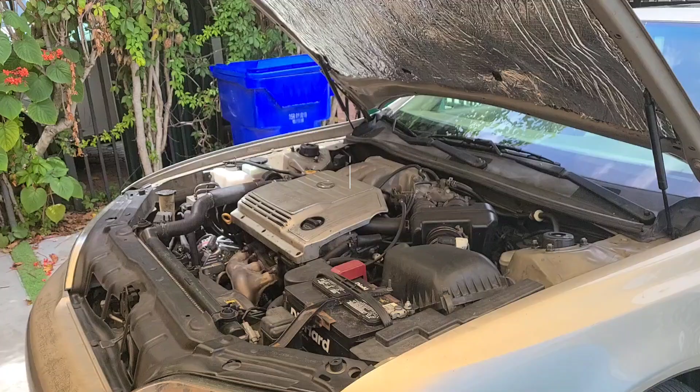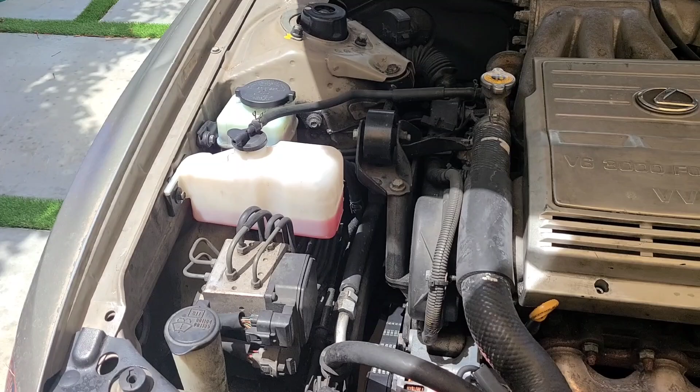In today's video, we are going to be replacing the transmission fluid, the coolant, the radiator, and this auxiliary, the two transmission filters on this 99 Lexus ES300. This transmission was built just over 30,000 miles ago, so we're going to be following the recommended time on that, and the coolant's about 41, maybe a couple thousand over 40,000 miles, so it'll be good. We're going to redo it all.

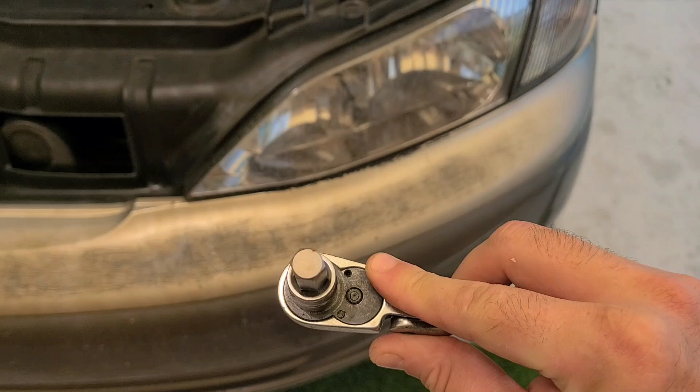This radiator, there's nothing really wrong with it, but it's about 5 years old, and I'm not sure what brand or anything that it is, so they're having a sale, and for about $100 I got the actual Toyota radiator. And since I'm swapping out all the fluids anyways, we'll be replacing that, and that's about my rationale for that. So step one will be to use this 10mm hex socket, get under there and drain the pan.

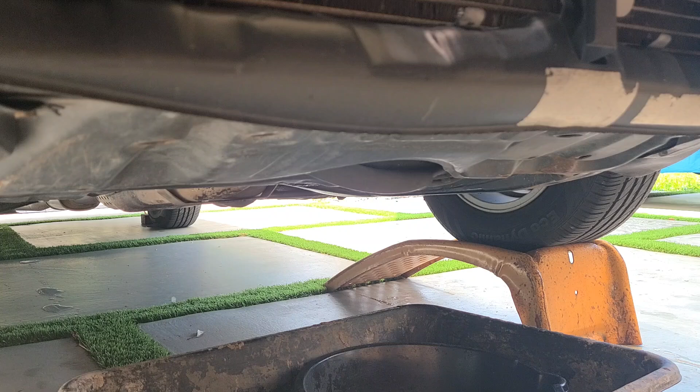Now the first thing that we're going to do is actually take out this dipstick. I need to go grab a paper towel to wipe it down. Now I've heard people go either way on this, but I've heated up the car and then I drove it around for a while. I've heard people say that it helps collect all of the... let me make sure I have this going the right way. That's counterclockwise. Okay.

Here goes the red. Ooh, that fluid is hot. Hot, hot, hot. Oh man, this is annoying. Ooh, that's hot fluid. God damn it. Okay. Oh boy, that is spilling everywhere. Great. That is hot, hot, hot.

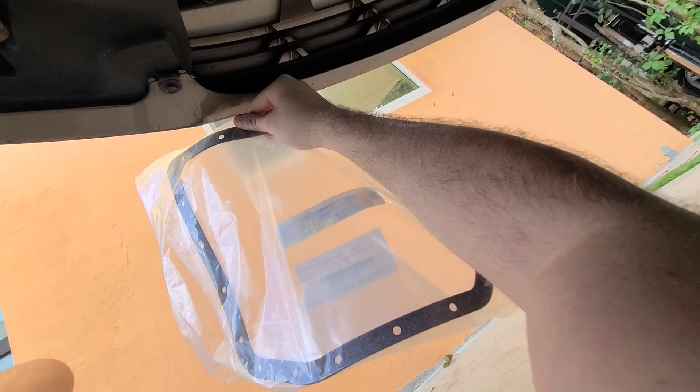The next thing we're going to do is we're going to remove the pan. To do that, we need to get to these 10mm bolts, and it's a bit tight in here, so let's see if this works. A couple tips I would give is, if you're doing the pan, make sure you have the right gasket. Especially on this car, they use two different transmissions, and they're very similar, the A541 and the U140E. So I just lined up all of the bolts and it looks like that's gonna work. And the other thing is to make sure that you can get to all the hard to reach bolts with whatever tool you're gonna use.

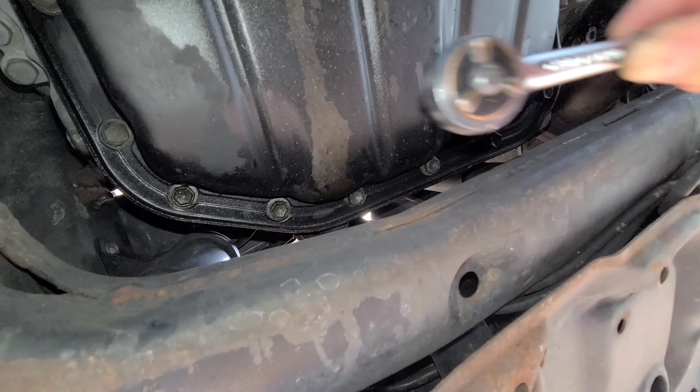And I think I am. I think in here, let's see, I think with an extension. So I'm gonna keep testing that. It's kind of hard to do it with the camera in hand, but I believe I can get to all these, especially these where the subframe is right there. So I'm gonna make sure I can get a good grip on all of them, and then we will slowly loosen this up and take this off. And part of the reason is you see that there's this wetness here, and I think that's coming from the pan seal. It may be coming from elsewhere, but we're gonna do a pan seal and filter replacement, so let's see how it goes.

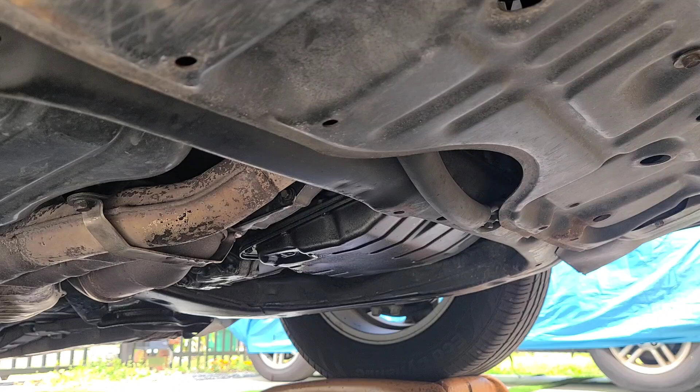Okay, let's get in there and see what we got. So let's test out. We can get to all the bolts. So I think this one a little tricky. Can I get to it from the other side? Move this.

Okay. Now let's see. So I can get one, two, three, four, 5, 6, 7. This little baby extension. Where's my baby extension? Okay. This little baby extension just gets us to this one, this one, this one, this one. Pop. These are just popping. Okay.

Okay, the pan came off, and I'll walk you through that. I just used this tool right here and got under, you see right there, right under there, and a little push and a tug and it came off. So we see here we have the strainer, I guess they call it, and that's dripping out. So we're gonna get to the filter in a second. We're just gonna let that continue to drip out, and let's take a look at the pan.

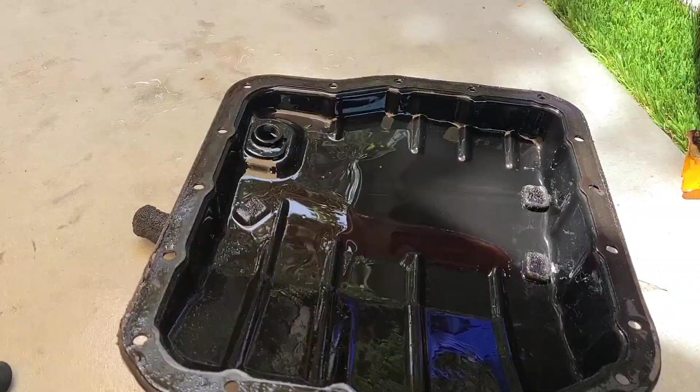So here's the pan, and interestingly, you see where the drain plug is, and you see how that's kind of elevated, so everything below that level doesn't get drained out. Now, I guess that's okay, but let's take a look at our magnets here. So we see there's a good amount of, where's that paper towel? Here's the paper towel. So we see here, good amount of crud on our magnets. So we'll be cleaning all of that up and then putting the pan back on once we change out the filter.

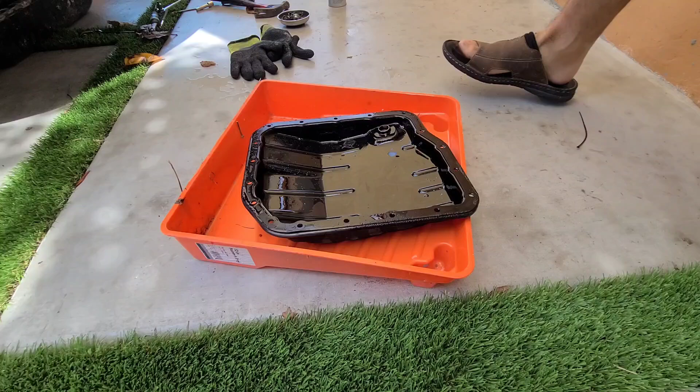Okay, so let's clean this off a little bit. We got our little magnets. Next we got some brake cleaner here.

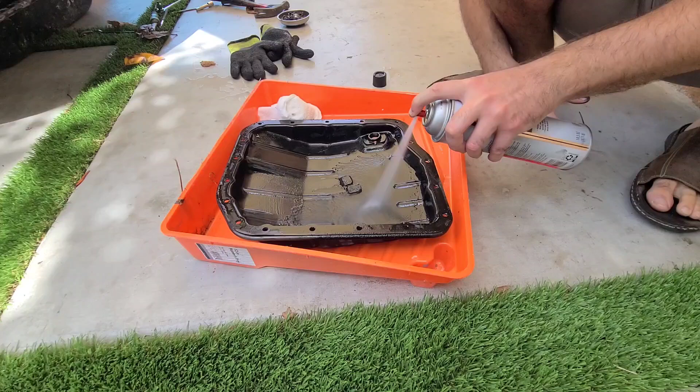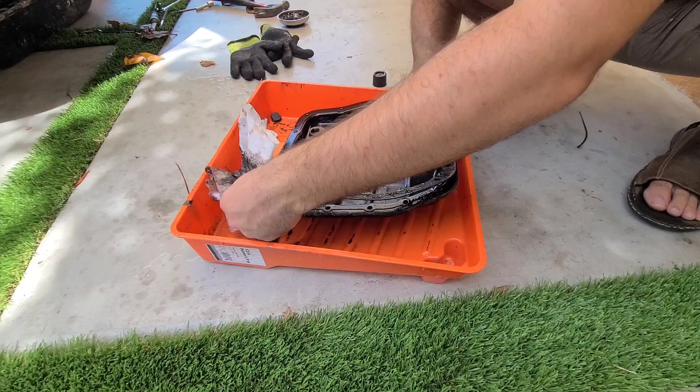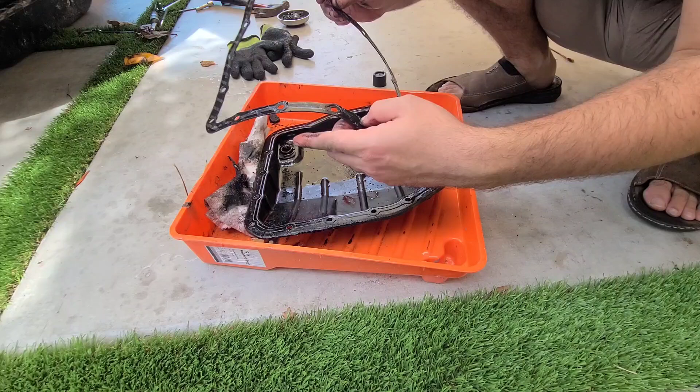Smell. Alright, let's get these magnets off. So I'm curious to see how much fluid this is going to take to refill. Now, I don't know if this is the original, not original as in, like, is this a Toyota gasket or is this... The Toyota gasket kind of has this corkish kind of look to it. So I'm not sure. Oh, we see this is 4-pack. So this is a 4-pack gasket for whatever it's worth.

All right. I mean, it's a little... I don't know if that's a paper gasket or what that is, but whatever. We're going to be getting rid of that. So let's give this a good clean down. Probably not good for your skin to do this without gloves, but you know, I don't do this often. Ooh. I may actually use some Dawn on this.

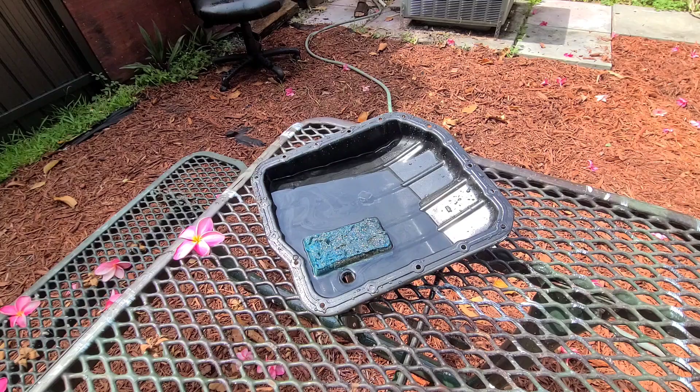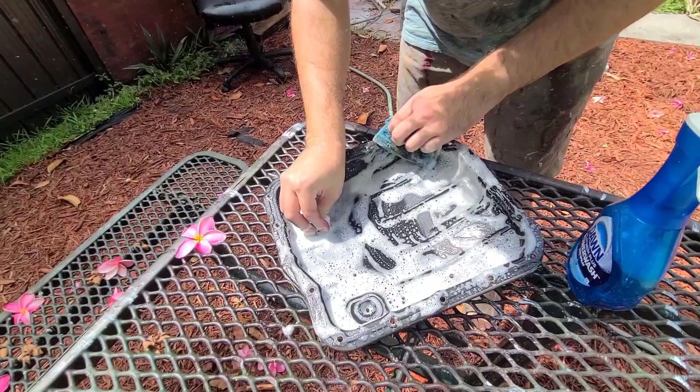Okay, so we're using some water. But we're going to use this Dawn power wash actually to try to get this clean. So we'll bring this out. This is supposed to be good on oil and a little less volatile. So let's get some of this and give this a nice scrub down. Look at that. It's like we're cleaning it like an oily dish. Let's see if we get these nice and clean.

Alright. We'll attach these to the bottom here. We'll do these separately, probably under some running water. I want to give this a good scrub down and rinse off. But this Dawn power wash actually breaks down the oil without it being such a volatile chemical. You know, not good on your skin and stuff. So this stuff should be working pretty good.

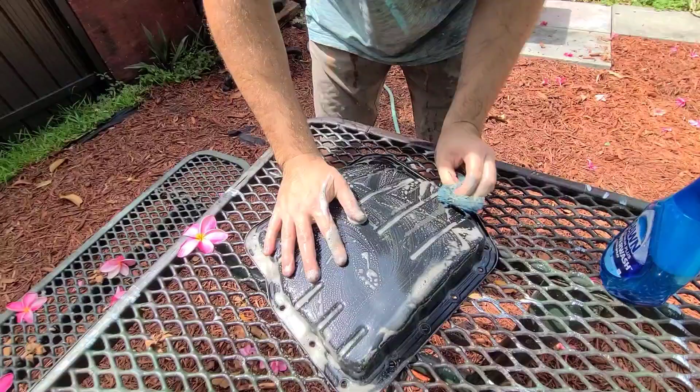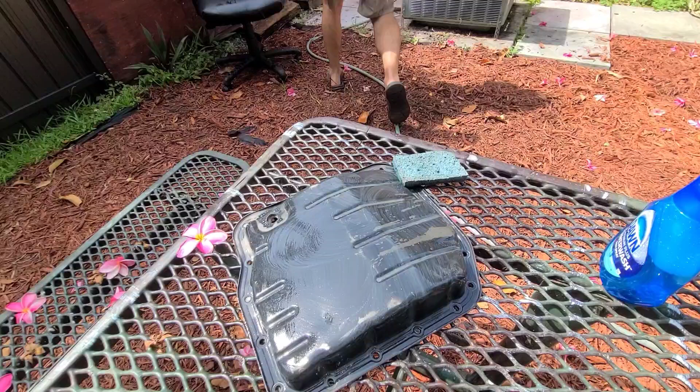Let's see, can I put this on my little... no, that doesn't attach there. Oh, actually, the table's magnetic, so let's... Okay, look at that. We're getting this nice and clean. Okay. Rinse this off. Or something there on the side. Wow, look at that. I'll probably do one more just to make sure we got everything. That's looking good. Okay.

Okay, now let's. Ooh. Yeah, that's looking good. Okay. So this Dawn Power Wash is great for oily parts without, you know, brake cleaner. You all know how volatile it is, hard to breathe, it gets on your skin and it starts feeling numb and weird, so rinse out this sponge.

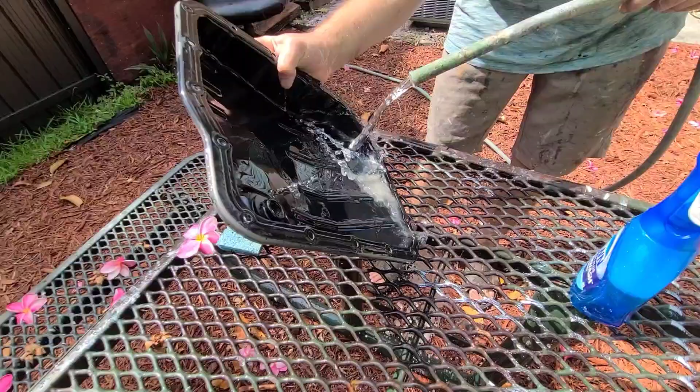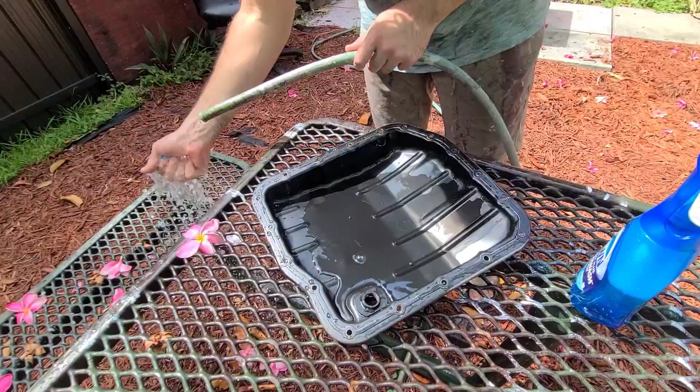Oh, there's still a little bit of oiliness here, so let's make sure we really got this sponge rinsed out. And let's try this again. Oh. Find these corners there. Okay, let's really get in there. Little corners and crevices and stuff. Really give that a good scrub down.

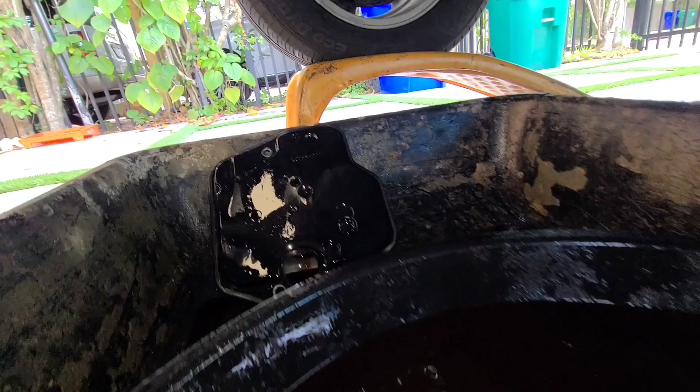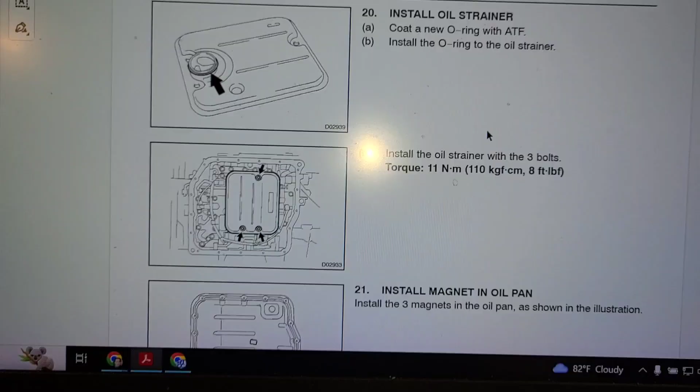Okay, so here we have everything fully disassembled. It was pretty easy to get those bolts off and get the filter. There we have our old filter. It's not that old, but we are replacing it anyway at the prescribed interval. And now let's take a look at the service manual, and the important things I want to see are where the magnets go. So we see here where the manual says that you should put the magnets, and they're pretty specific. It shows them even with a little bit of an angle. So we're gonna get that the right way, but before that, we're gonna put our new filter.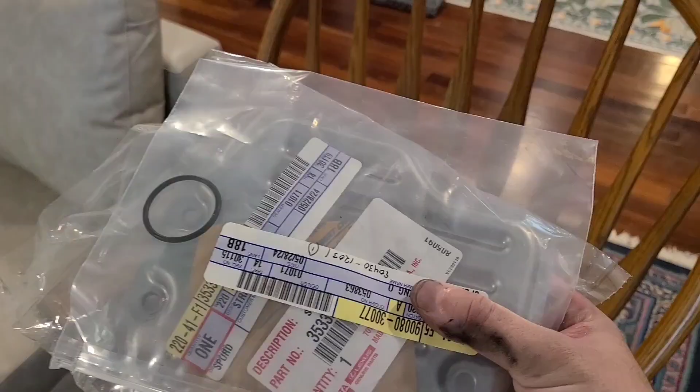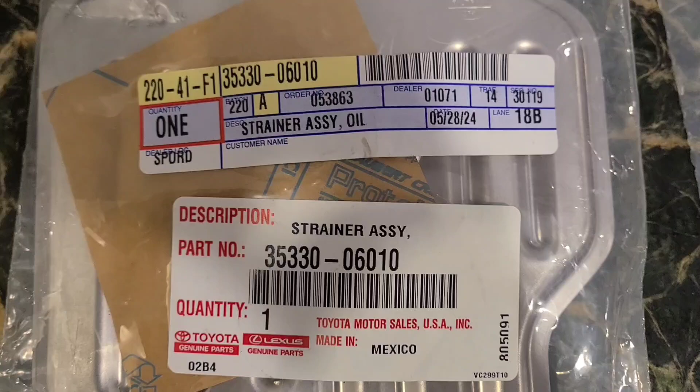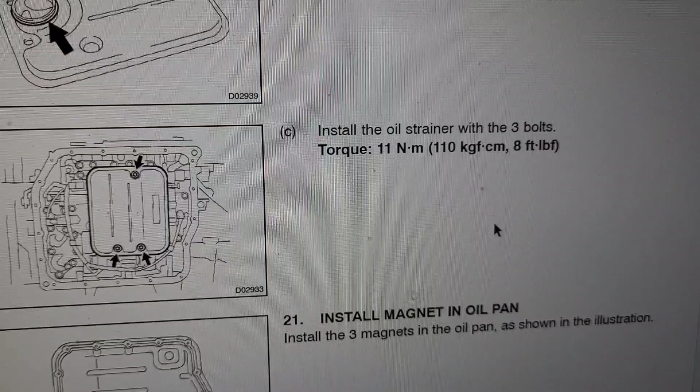Well, I guess technically it's a strainer, so if you want to see, here are the part numbers. For this strainer, for this particular car, even in the service manual it shows a different shape, but luckily the one that comes out of the car is that one. And we see here, this is the O-ring, very important, because as far as I can tell, it doesn't bring an O-ring. Yeah, I don't see any O-ring on here. So definitely want to get the O-ring if you're doing this. The other thing to take note of here is the 8 foot-pounds. I have a little torque wrench. I may just go good and tight, as they say, but we'll see.

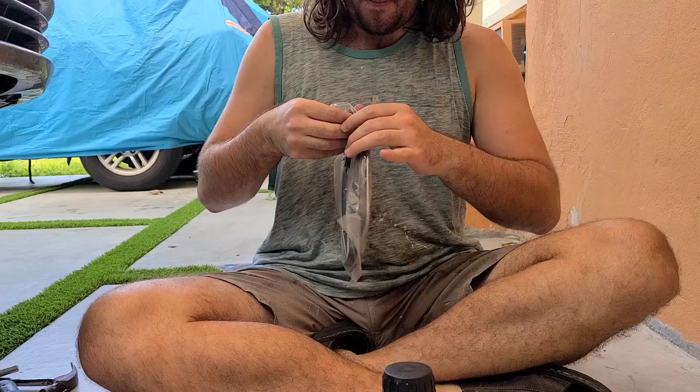So here we go. Let's take this stuff out. Okay. Carefully. Ooh. This comes undone there. I like this little cover that they used. Let's get our O-ring.

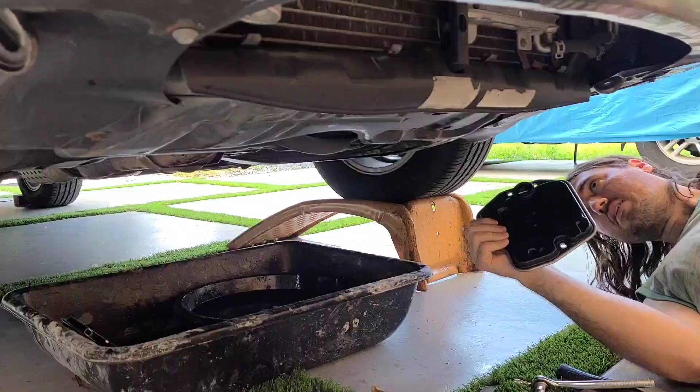And what we're gonna do here is I'm gonna pour a little in the bottle here. See, this is that type 4. And let's get it nice and submerged. Okay. Pour this back in. Okay. Some of that. Okay, so we see this is all looking good there. Get this in place. Goes like.

Okay, so I think we have the magnets on the right way here. Here we have how I have them on the pan. Here we have there, and we can see there's this slant here, so I don't want to put it over the slant because then it's going to be kind of sticking up a little. But other than that, I think we are looking good. So this pan is ready to go.

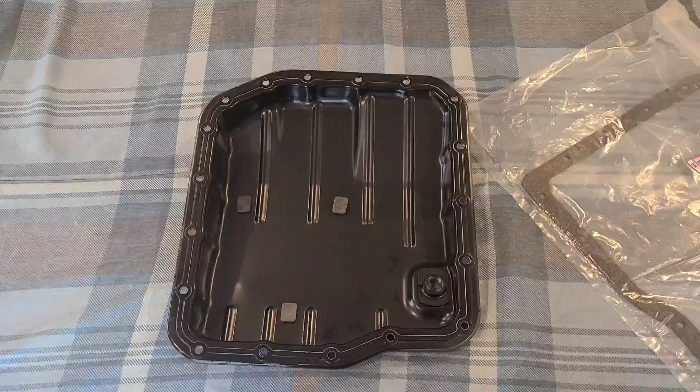Okay, we're about to put the pan on. Let's see how this fits. Now this is something. Toyota, they put these staples through the freaking gasket. Good thing I looked at that. That's not cool, Toyota. Want to make sure I keep track of those so they don't go in the pan. So those are there. Okay.

Nothing's in our pan. Alright. Looks like it fits pretty well. You see, it's like, yeah. Okay. And I'll be unstapling the gasket.

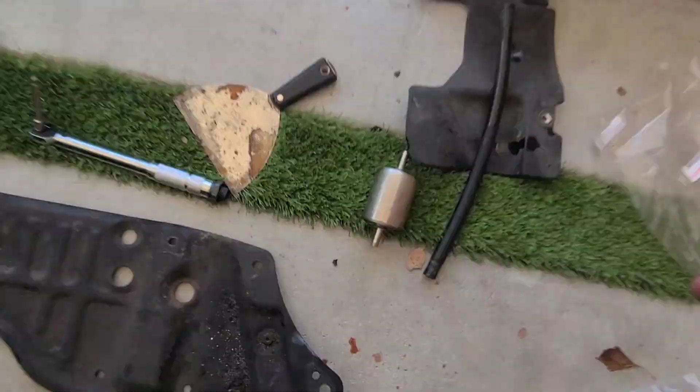Here's where we are right now. So we've taken off all of the transmission line hoses and drained those out. And if you've seen this car in a previous video, this car has an inline transmission filter, which I installed when I did the cooler. So I have a new one of these. This one I think only has like 20,000 miles or so, but since I'm switching everything out,

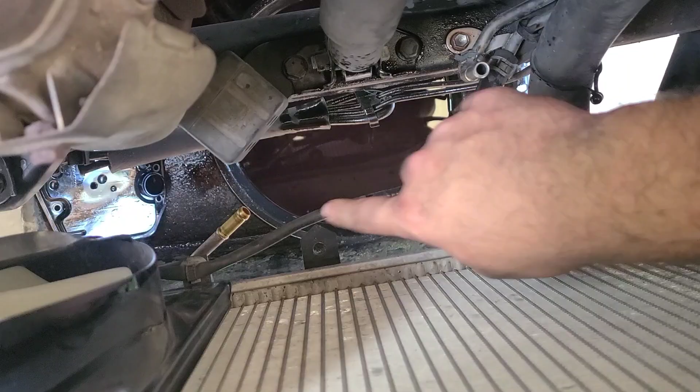the whole idea of putting the cooler and the filter was because this transmission would overheat. So just by the nature of what it is, this transmission's known to have issues. So I have a new Magnefine filter, and I run it inline right here. The flow of the fluid is that it comes out this line, it goes there, it goes through the cooler, it comes back, it goes into the radiator, through the radiator, comes back into

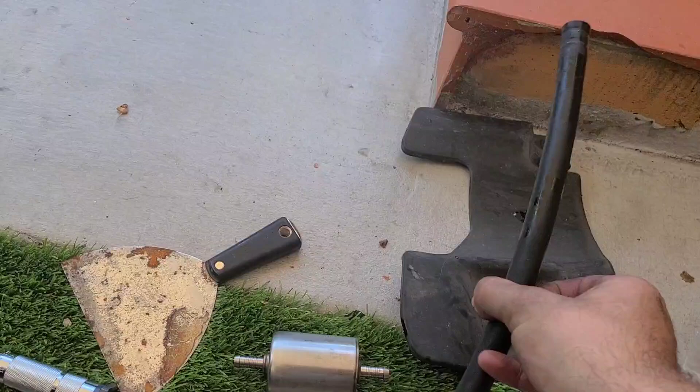the transmission. Now the quirk of it is that I had ordered this hose, you see this part number here, to replace this hose. This is, for all that I know, the original hose, but this part number isn't the right length. So here's the new hose, and it's about 3-4 inches short. So I'm going to use this to be the hose on the filter. And I also like that this kind of hose has this texture on it.

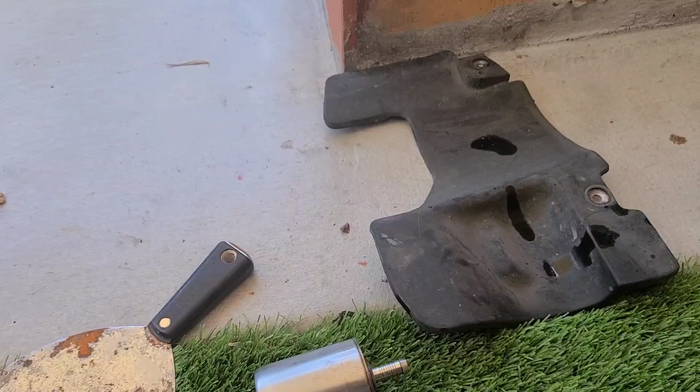If my camera would go in focus, there we go. Oh no, of course. Come on, come on, come on, camera. You can't do macro focus. You're not doing any focus here.

There again. So you can kind of see it. There you go with the light. And I kind of like that texture, especially for taking stuff off. And the other thing is that when I went to take off the old hose, I had to essentially ruin it because it was just so stuck on there. Whereas this hose seems to be snug, but it doesn't glue itself on there or whatever happened.

So in the future, hopefully I'll be able to find the right part number for this one, but it is not this. This is the long hose that goes from the radiator back into the transmission. So it needs to be a pretty long hose, but the one I got didn't work.

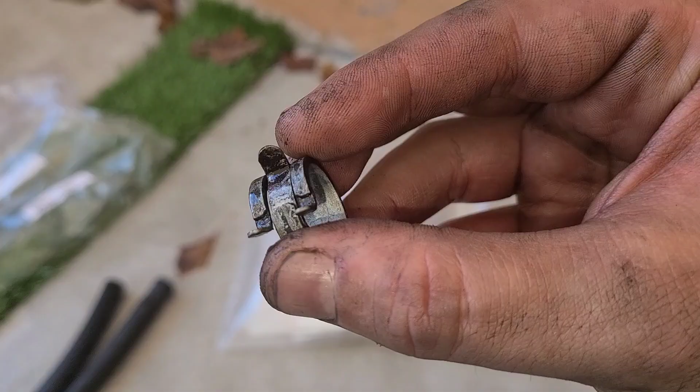The other thing I'm replacing is that originally they all use these clamps that have separated ears. I'm sure if you have the right tool, this is easy, but if you're using pliers like this, they are a pain in the ass because it slips off the little ears. So when you order the clamps nowadays, it comes like this. This is a much better style because there's a lot less chance that it slips off, because they've connected the ears with a bridge.

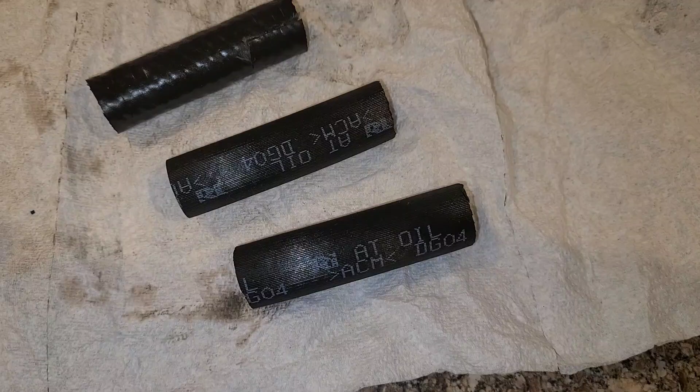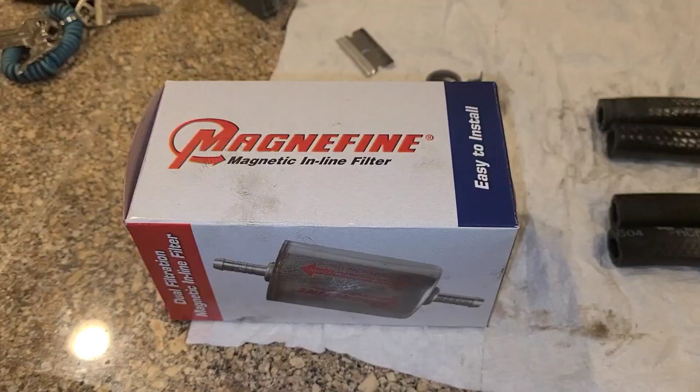So I'm replacing these. I replaced most of them, but I miscounted before and I didn't get these. So I got the 3 new clamps, and I'll be swapping those out. I'm gonna cut this hose to the right size for that to fit, and then we will install that and keep going. Okay, here we have the pieces of tube here, and we'll put them together. So there we go. Here we have this Magnefine filter.

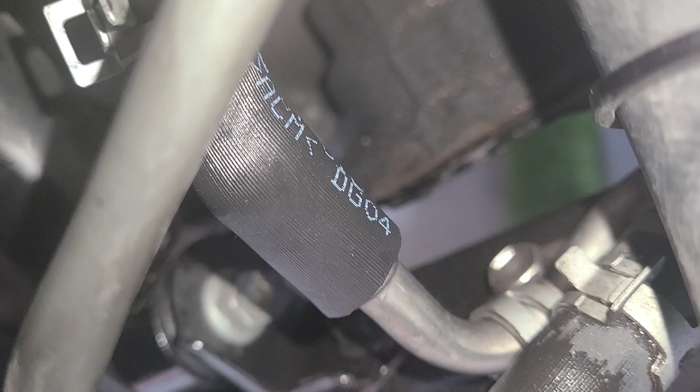Here it is, brand new. Another thing I want to say is that getting it to fit in there is a pretty tight fit. You essentially have to put the top on and slide the bottom over a little bit and really push up on it until it finally walks its way down the hose.

But it does get in there, and the good thing about it is that most of the time when you're putting in one of these aftermarket inline filters, you have to rig it somewhere so that it's not clanging around, with some kind of zip tie or whatever it is. But this is solid. This isn't going anywhere. So that's one of the benefits. Once you do get it on, again, you're only doing this every 30,000 miles or so.

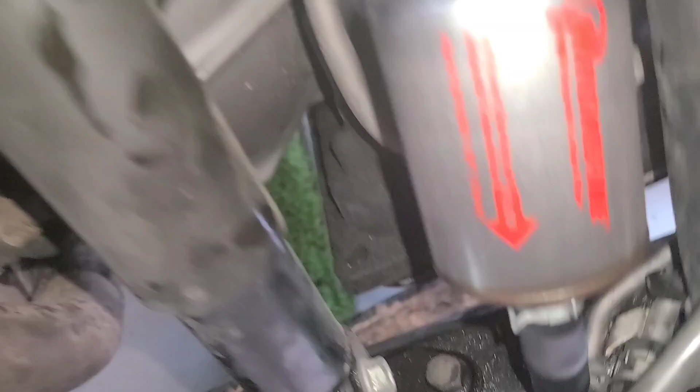And to maybe make it easier, just get an extension of hose so that it's a fresh hose and not something hard and brittle. But there, you see it's on there, and it's all the way down at the bottom. It's good to go. So let's get the clamps on there. Here are the new clips.

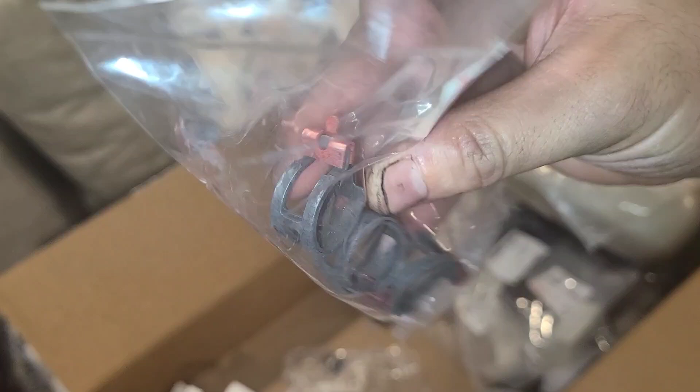These I actually got from Amayama, and you can see these actually come in black for whatever reason. But interestingly, these are the ones for the transmission, and this is one I got for a power steering hose. Now famously, power steering usually runs with some kind of transmission fluid, but it's a lot thicker. It's almost double the thickness there as the transmission. So either way, slight difference there.

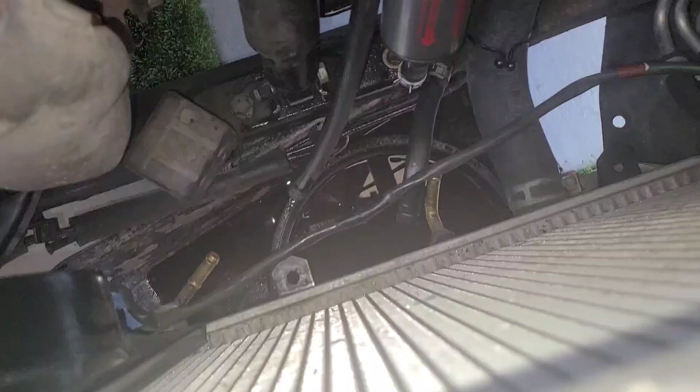Now I believe this whole setup is here, and the next step will be to drain the coolant, but I need to deal with my current drain pan so that I can do that. And the coolant is draining. 1 out of 3. We've got to do the radiator and then the 2 ports for the engine block. We took off the radiator cap so that it can breathe, and she is getting drained.

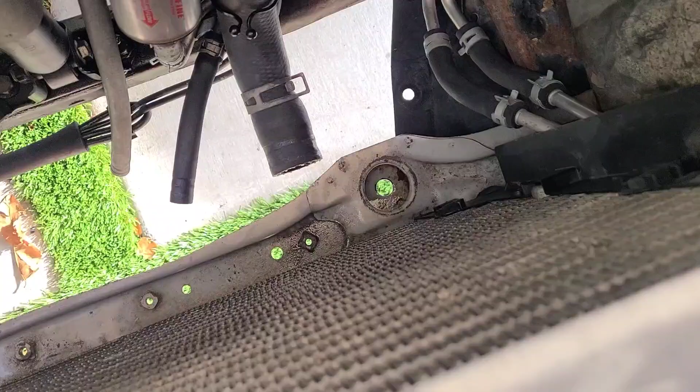It's the next day, and here's where we left off last night. I was cleaning this area down here where I'm going to be putting new bushings. It seems like at some point I hit something, because this got bent, and we can see even the condenser got bent, but apparently it's been like that and it's not leaking. So yeah, that could have been a curb or who knows. That's why it's good to have that shield on it.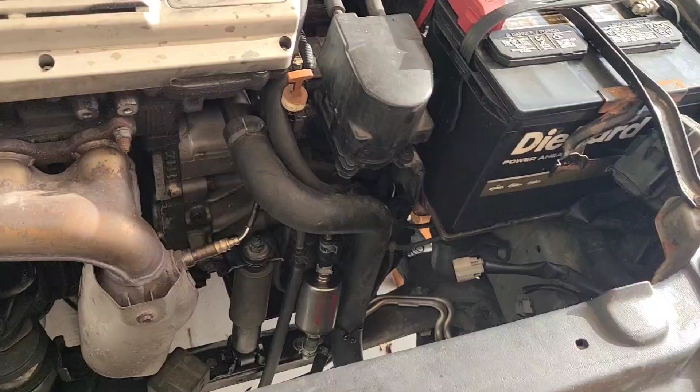So we've got to replace this hose, then put the radiator in and connect everything up and put it back together. It shouldn't take too long. There's some rain in the forecast for later today, so we're going to try to get this done hopefully before the rain starts, and hopefully everything works.

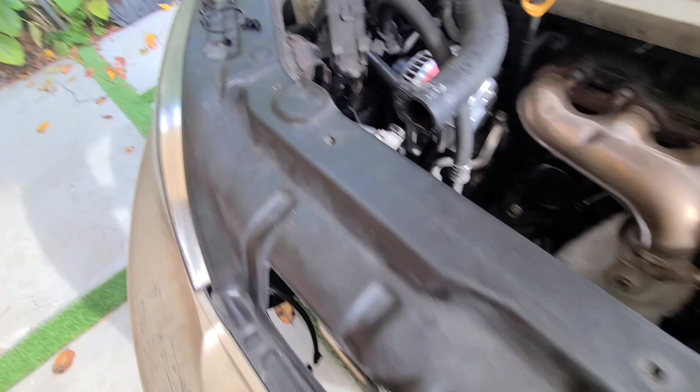Here we have the old and the new hose. Let me see here, it lines up. I like that they put these little lines on there. Now this is obviously to signify the top. I'm not sure what these dots mean. I know there used to be a bunch of these little holders for various cables and such. One of them is this one, so we're going to put that on, and I think it's telling you right there, and you can see it kind of faded on there.

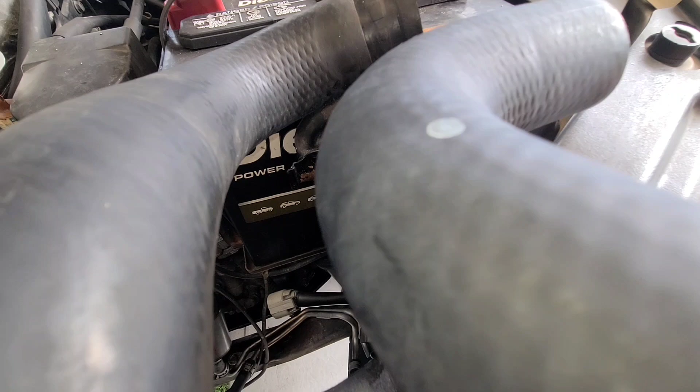I wanted to see if that hose was original, but it's kind of hard to tell. I'm not sure whether it is or isn't. It could be. Oh, okay, I'm seeing that writing there. Now again, there's nothing really wrong with this hose, I just believe it's original. So since we're doing all this, and it was only a few bucks for the hose, we'll be replacing that.

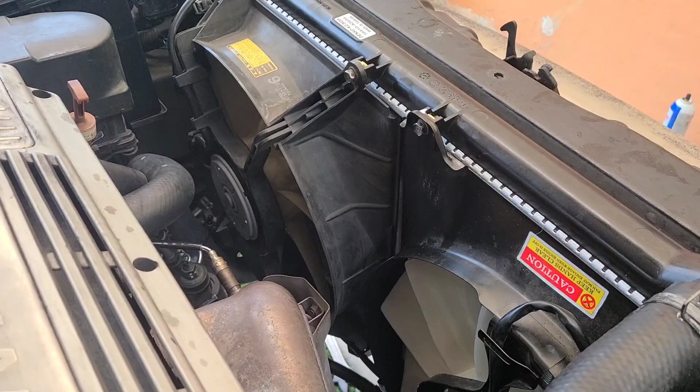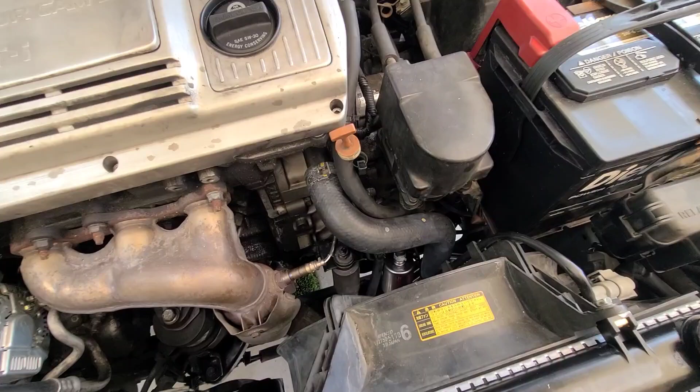I believe we're at the point now to put in fluids. So we're going to do a last check here. So other than the bottom cover, we have the fans on. Okay. So here we have the fans. We have all these hoses connected. So we have the inlet hose. We have the outlet hose. What else do we have?

The transmission line. The filter has a clamp top and bottom. The return line has a clamp top and bottom. And unfortunately, a little note, those clamps I ordered still have the little bunny ears. These are the ones I ordered from Amayama, so from Japan. So in Japan, they like using those little bunny ears. Like I said, I'm sure there's a tool that works with that.

But we see here, these are, I believe, the same exact part number from a Toyota dealership, and it has not the bunny ears, but the bunny ears are connected. So there you see right next to each other the Japanese version of that part number and this version.

These are the new bushings. Let me just double check that this is tightened down, and then we're gonna do fluids. I believe we'll do transmission fluid first, and then we'll do coolant.

It's a couple days later, and everything got done, and I've since driven it probably about 100 miles or so, maybe about 80 or so miles on the highway, and the rest doing city driving, maybe a little bit more than that. Everything shifts fine. So everything got put back together. It doesn't seem like we have any major leaks.

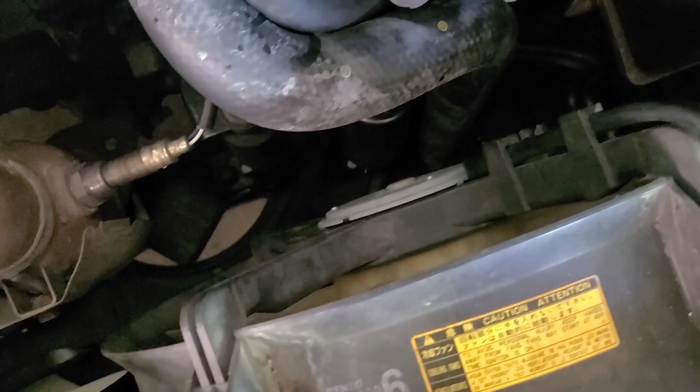Here we can see the coolant is at the top level, but the reservoir is a bit low, so I'm going to add a bit to the reservoir. Essentially, to fill it up, it took just over a gallon of coolant and then a matching gallon of water.

Everything that was included in this repair, if you'd like, I can put part numbers. Like I said, I replaced the hose. I'd gotten the hose down there, which I thought I was getting this hose, but it wasn't the right one, so I replaced these two little segments of hose, and I still have some pieces of hose left.

I did the pan gasket, cleaned the magnets inside the transmission, as well as swapped out the strainer. I definitely would recommend every time you do a drain and fill in the transmission to clean those magnets. So in 30,000 miles, I'm going to replace the Magnefine filter and also the pan gasket and clean the magnets inside the pan. I likely won't change the strainer again, especially since I have this auxiliary filter, but that's my thinking on that. So let's top up the reservoir.

But the thing with the coolant, while bleeding it, you fill it up, and then when you turn it on, it expands, and it started, not leaking, but overflowing and then dripping down the engine. So it looked like it was leaking, but it looks like the level there is pretty good. So let's get the reservoir about in between those two lines.

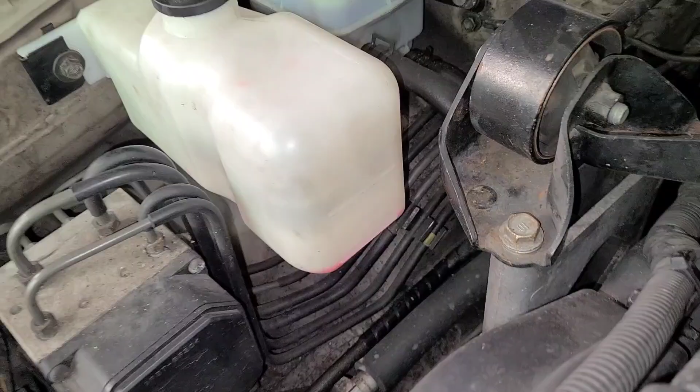So I have left over almost 2 gallons of 50/50 coolant. To have containers to take the old coolant, I needed to just mix the rest of it. I actually needed to get a little more distilled water. This is a full jug of 50/50.

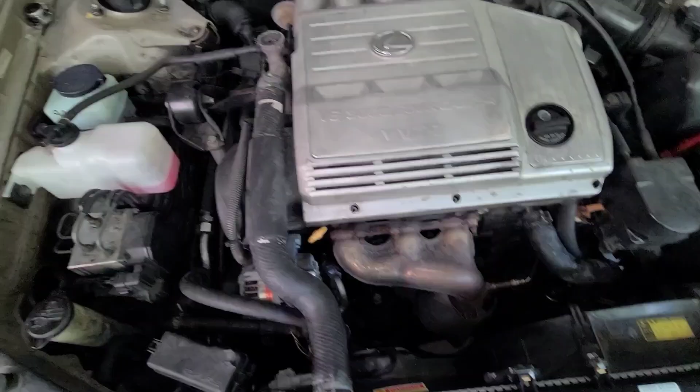Okay, so here we have the coolant, and it made a whole mess since the jug was nearly full, but there we have everything topped off, and the engine's completely cold. That's why I can touch this just fine. So I'm about to go run to the grocery store and back, which should be a good drive, and then I will check the transmission fluid level with the car running and hot to see if we're in that level. We see here, power steering fluid level is good, coolant level good, and we'll check the transmission fluid level.

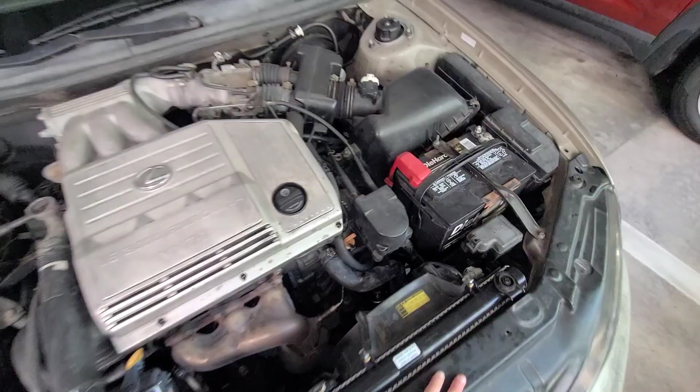Okay, so we are about to check the fluid level. Just went for a good drive. I just ran it through all the gears, so everything's nice and hot. I went on the highway. I've been running a couple errands for about an hour, so it's definitely all the way up at operating temperature. If I can get this thing back in with one hand.

Okay, and let's see. And it looks like we're a little bit below the hot, so I should get a little more fluid in there. Let's test it one more time. Yeah, we see it's about halfway between the cold and hot, and that, like I said, is after a pretty good drive. So I'd rather it be a little low than overfilled, but we'll get some extra fluid and get it in there.

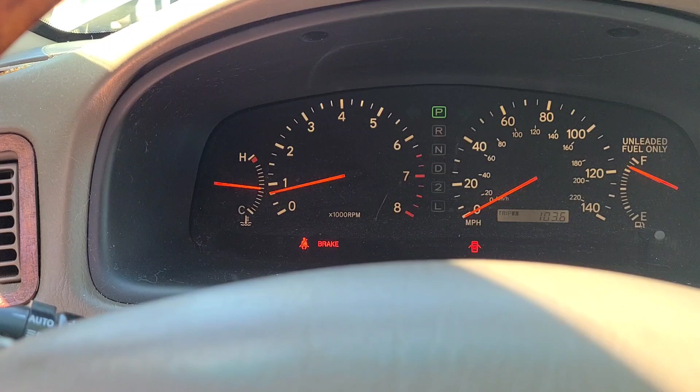To wrap up this video, we see here, I just drove the car. It's been driving for like an hour and a half, and it's completely warmed up. So let's go check the fluid level. And here is the fluid level. You see it's right in that hot zone. And that's where the line is. We see there. And there. So I'm not adding another drop.